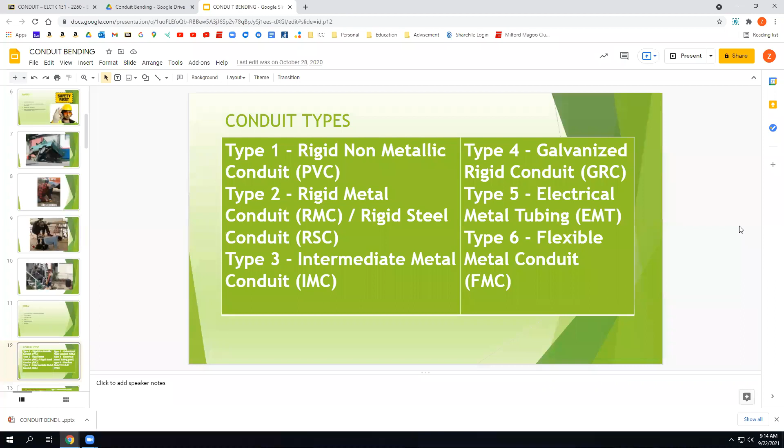Conduit types. Rigid non-metallic conduit, that's PVC. The ends and fittings - if the ends are not belled like you see in that picture, they have fittings that you can buy. And how do you put PVC conduit together? Some of you should know this. With glue.

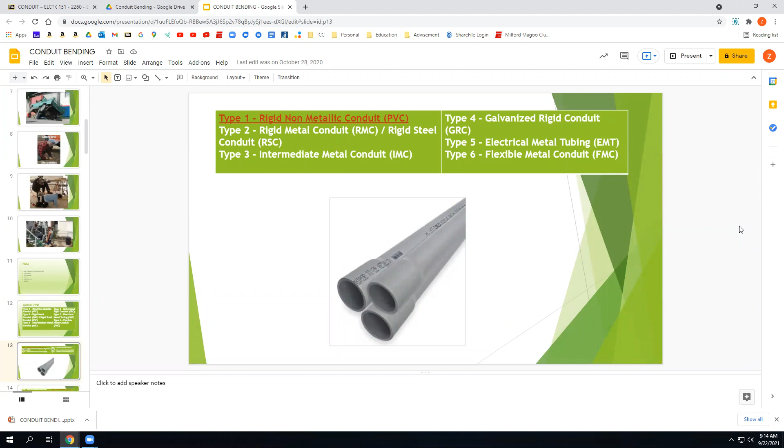RMC, or galvanized rigid conduit. You'll see both types in the code book. Most rigid that I've ever used has already come galvanized. I've never seen rigid conduit come from the supply house that doesn't have a galvanized coating on it. Galvanizing is that silvery looking outside coating. It's like a paint, but it's more to protect it from the elements.

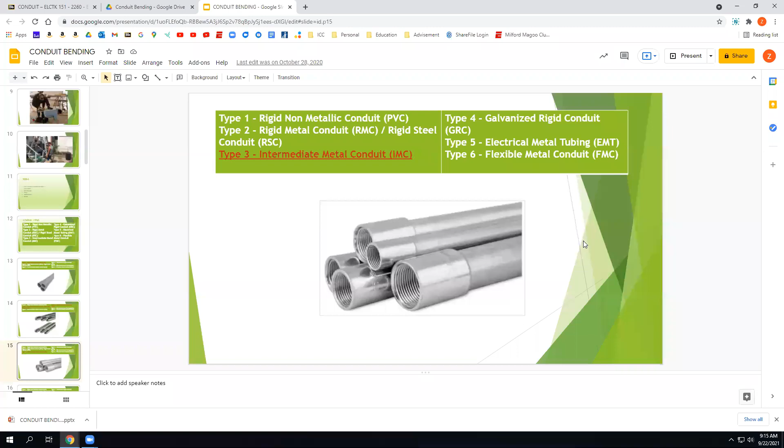And that type of conduit gets threaded together, so you can see the ends of the couplings are threaded. IMC is the same kind of thing, but it's made out of aluminum, intermediate metal conduit. It's just not as heavy duty. EMT, that's what you guys are bending in the lab, and those use either compression type or screw type fittings and couplings.

And then flex, and it's called flex because it's flexible. You get that? Somebody asked me about a mnemonic so they could remember that. You're gonna have to just study.

All right, somebody asked me about seal tight. Anyway, if you guys are curious, we do have some flex and we have some metallic and non-metallic seal tight here. Seal tight is just weatherproof - it's flex, but it's PVC coated. And if it's metallic seal tight, it has this flexible conduit inside it. And if it's non-metallic, it's just a PVC flexible tube.

Somebody asked me if it's okay to use, and I said, well, yeah, absolutely. But in the field, if you're good at what you do, people that don't know what they're doing use flex all the time because it ends up looking like shit. But if you can put EMT or rigid conduit in there, it's more professional.

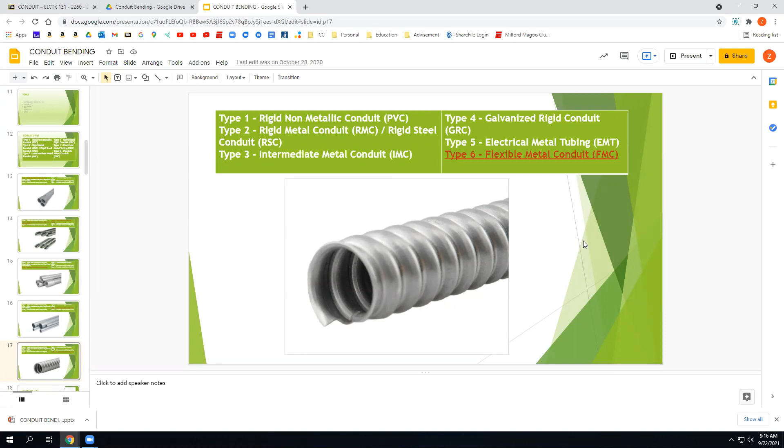We went over this last week, but you're allowed 360 degrees in any pipe run, and that's just between two pulling points. So hang on a second.

That's not what I want. Anyway.

What I mean by that is if I'm going from junction box to junction box to junction box, I'm allowed 360 degrees between these two. It doesn't have to be 360 degrees total, it's between any 2 pulling points. And we went over the reasoning for that. What is the reasoning for that? Why do they limit you to the number of degrees between pulling points?

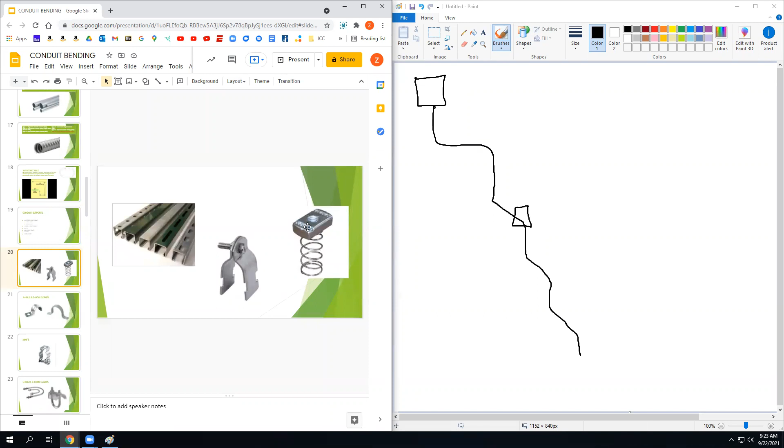unistrut—this is called a strut strap, this is called a spring nut. Can you see which one's a 1-hole strap and which one's a 2-hole strap? Yeah, count the holes. This is called a mini, and you'll see those on the wall bends when you do those.

U-bolts, conduit clamps. But don't discount those pictures, you'll want to look through that to take your quiz—just saying. Support spacing, all right.

This is an example of some numbers that you would pull out of the code book, and we'll go through more of those numbers later. EMT, section 348-13. I don't know what the -13 means.

It's supposed to be a dot, but there's a whole section in the code book on EMT. If you've done your code homework, you've probably seen it already. With EMT, for certain sizes of different types of conduit, you're allowed so much space from each pulling point.

So that would be a conduit like is shown in the picture, or this is a 4-square junction box. You're allowed so much room from that point to your first support. For EMT, you have to support it within 3 feet of the termination. Then between supports, between the boxes, you're allowed 10 feet, and that does not include a coupling. You don't have to be within 3 feet of a coupling.

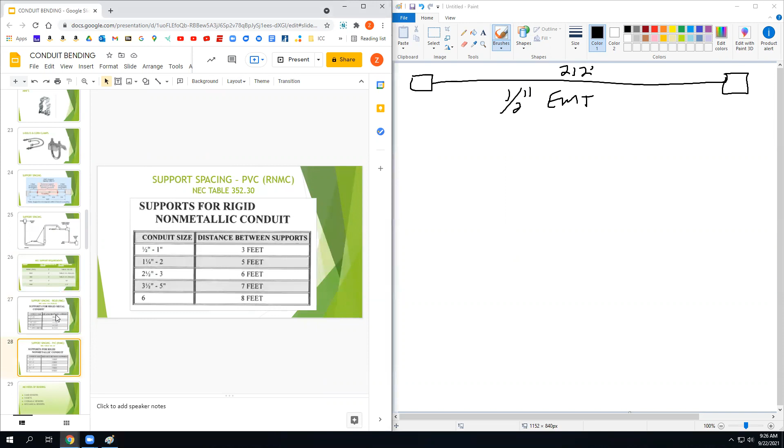You're going to start with this table here, NEC support requirements. Then you're going to finish up with another one.

Here's the quiz question: 212 feet of half-inch EMT between 2 junction boxes. How many supports? Heath says 71. He's very confident. M Daddy says 21, I think. That's his answer on the quiz.

212 supports. Lewis says 212. 212 feet between the boxes. Okay, what's your answer? Okay, what's the first 3 feet away from each box, then will be 209.

Well, let me check. I don't know what to put right now. 206 will be... 22. 22. Says Lewis. All right, we got 3 guesses there. Anybody else want to guess?

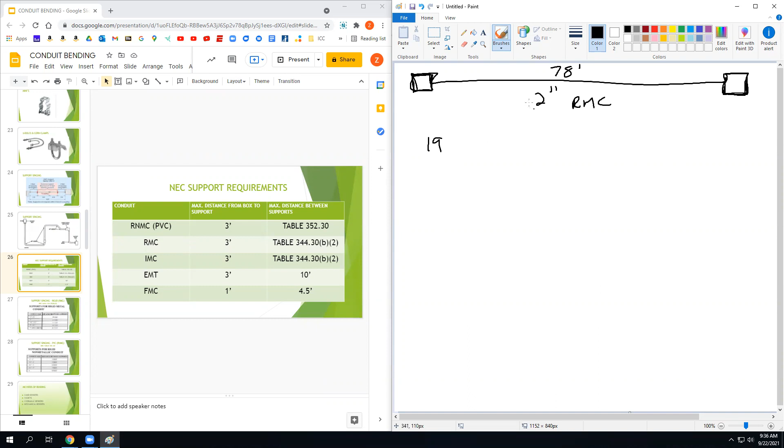So how many feet do we need at the box? From the box, you need 3 feet. Right at the table, yep. So 3 feet from the box. And how many feet between supports? Conduit size, distance between supports, it says it on that first table. Okay, max distance between the supports, see table 344.30B2. Oh, look right there, it's right there. So 2-inch RMC, supports for rigid metallic conduit, we're allowed 16 feet between them.

Okay, kindergarten method, anybody else want to guess before we figure it out? Okay, 3. And then what's our next one going to be? 19 plus 16 is 35. 51. 67. 1, 2, 3, 4, 5. 73. Right, 67 plus 16, and then eventually we got a box at 78.

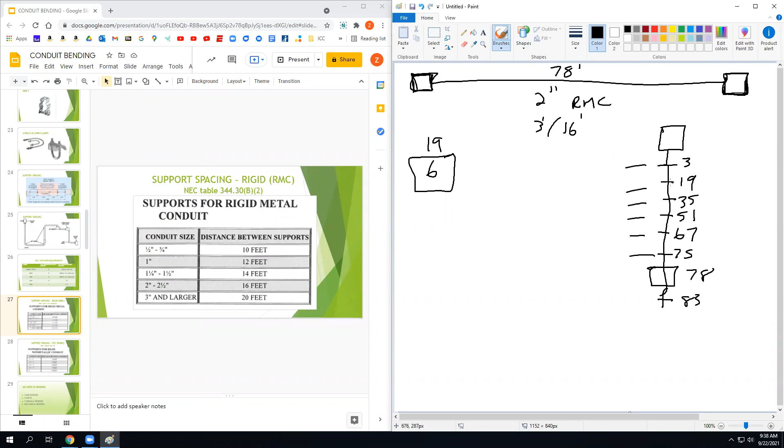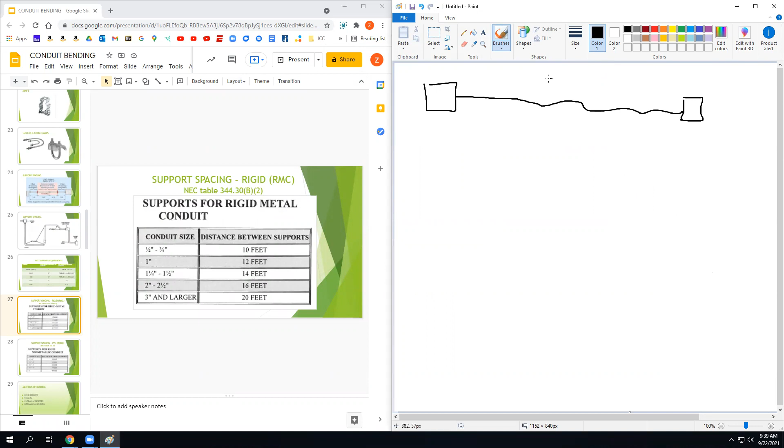You get the prize. Who said 19? We got a flexible one. Run and flex from there to there, 32 feet between the boxes. And we're using, I don't know, 3/4 inch flex.

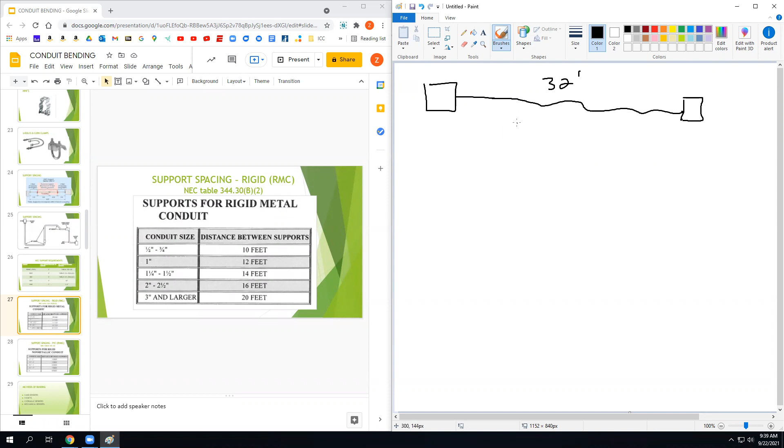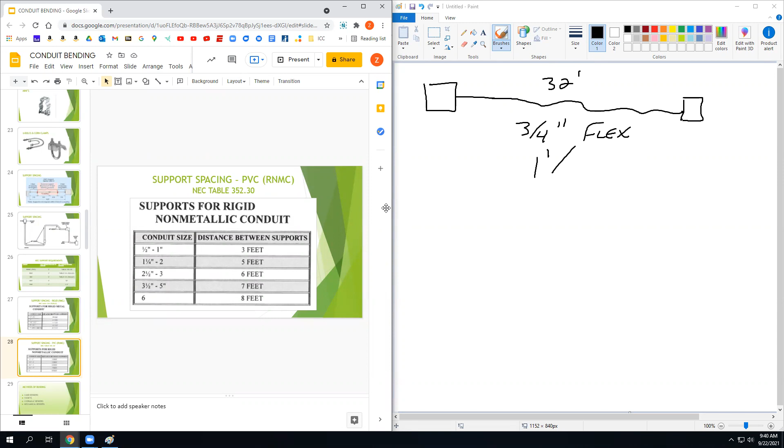So what's our spacing? 7 feet. What? 17 is your guess? 7 feet. Oh, you already looked it up. So you're 1 foot from the box with flex, and you need... where'd you get 7 feet from? Table 352.3. Or am I looking at the wrong one? 0.30? Yeah, this is supports for rigid non-metallic conduit. Oh, looking at the wrong one then.

PVC. If you're looking at the first table, start with this one. No matter what example you're given, start with this one. FMC, flexible metal conduit: 1 foot, 4.5 feet. That's our other number.

4.5 feet, guesses? 8. 1. 5.5. 10. 14.5. 19. 23.5. 28. No, yeah, 28.

32.5. Ethan, you're gonna check my math, right? Oh, 32.5, so we're past the box. Box is at 32 feet. We're within 4.5, but we're not within 1 foot next to the box, right? So we got to add one there that's at least at 31. So that would be 1, 2, 3, 4, 5, 6, 7, 8. So Carter's wrong.

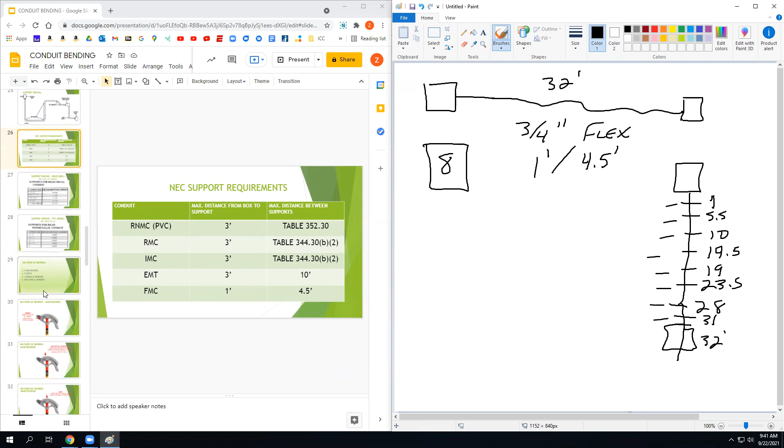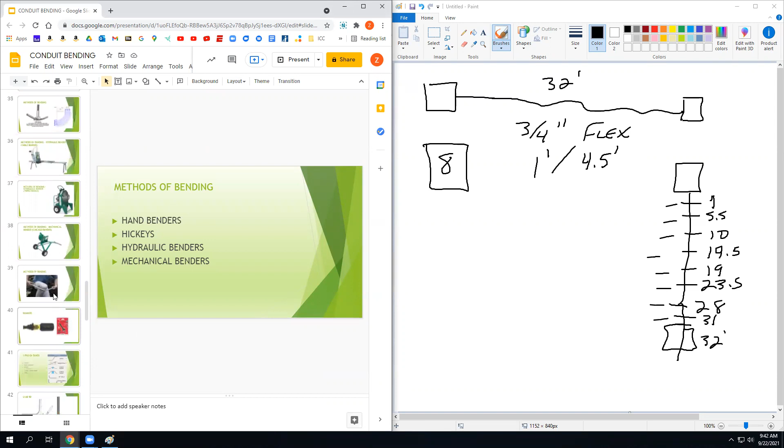Hand benders, hickeys, hydraulic benders, mechanical benders. Let's skip down a little bit. This is a hydraulic bender, it's a table bender, used for bigger, usually larger diameter EMT conduit, like 4-inch. It's nice because bigger conduit is heavy, but you also need a bigger radius shoe to bend bigger EMT conduit because it's thin wall, and if you don't use a bigger radius shoe, it will kink.

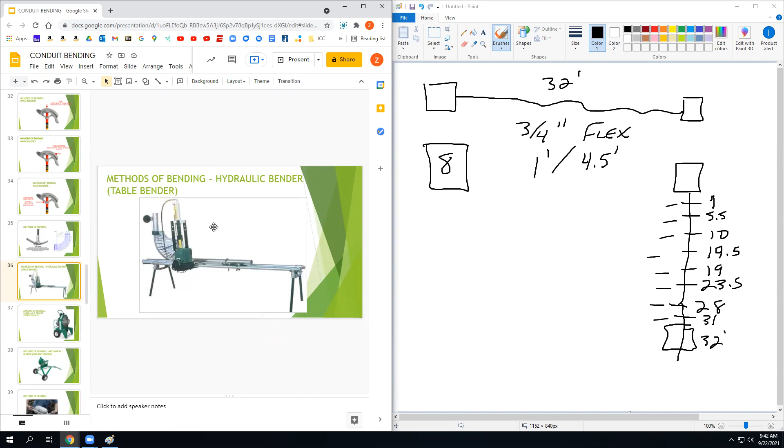This is called a triple nickel. There's lots of different manufacturers for these, but it's just a hydraulic bender, pretty self-explanatory. There's a shoe on the front that's got, on this one, 3 different radius of pipe that you can use. Then there's a button you press, and it uses hydraulic pressure to bend the pipe along that shoe. And there's degree marks on the front of it.

This is called a triple nickel because it's the Greenlee 555 model. I didn't know that when I got into the trade. I thought people were saying triple nipple for some reason. But that's just because of where my head's always at.

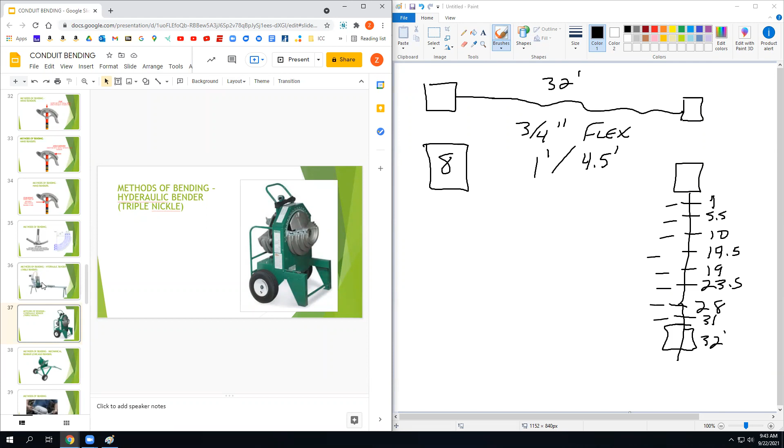I don't have the table bender, I don't have a triple nickel, but I do have this, it's called a Chicago bender. This is a mechanical bender, it does not use hydraulic pressure, it uses leverage. So if we get a little time at the end of the semester, I'll pull that thing out and we can make some bends on some bigger pipe with that.

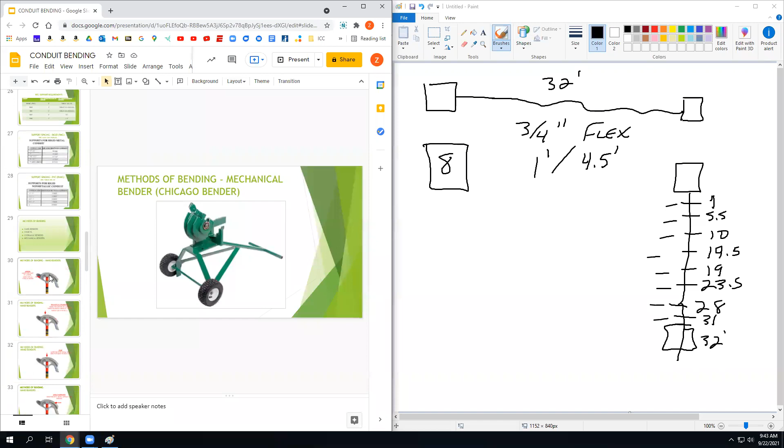Back to hand bending though. Get yourself familiar with these slides.

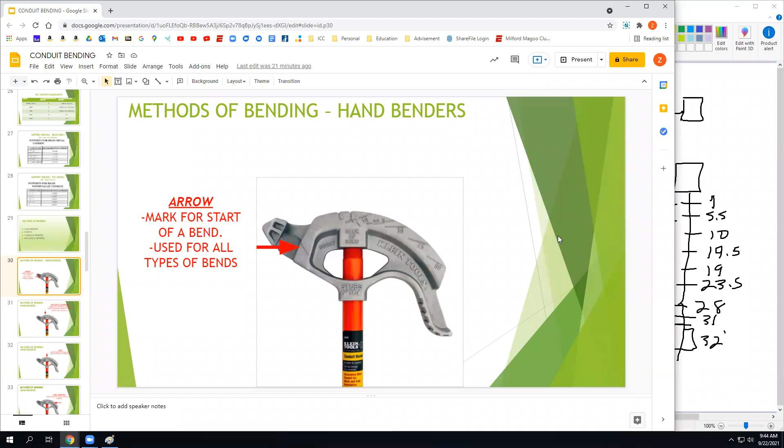What size pipe is the bender that's shown? What size pipe is that used for? Can you tell? There's a clue. Can you see it? How'd you get that? The stub 6-inch to the arrow means that's the take up for this bender.

So a 6-inch take up is for what size conduit? Remember when you're bending a 90, you need it to be so tall, you have to know what the take up is. It's on your cheat sheet. Right, 3/4 inch EMT.

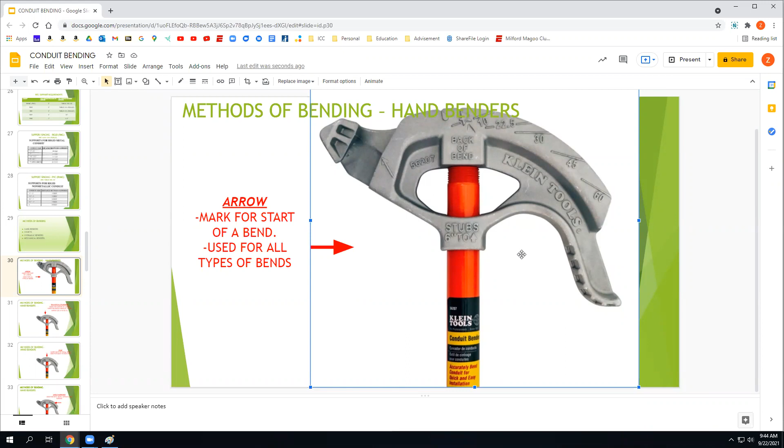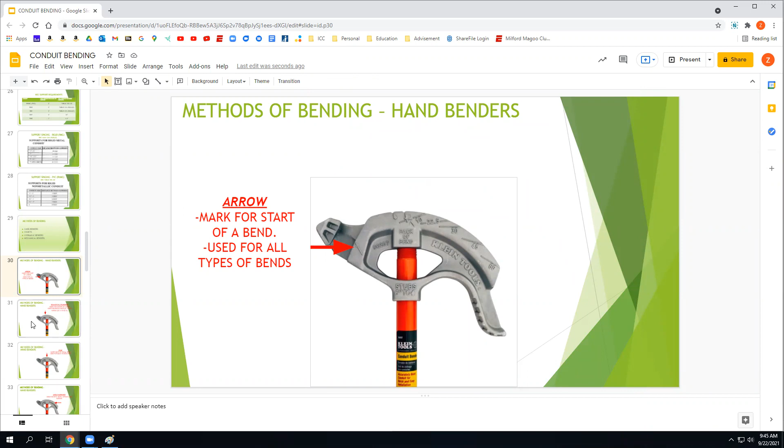Arrows marked for the start of the bend, used for all types of bends. Remember, that's the start of the radius of the bend. Rim notch, used for the center of a 3-point saddle.

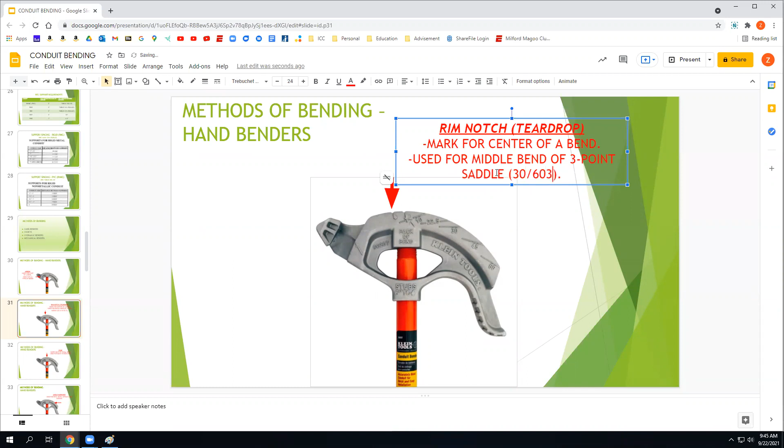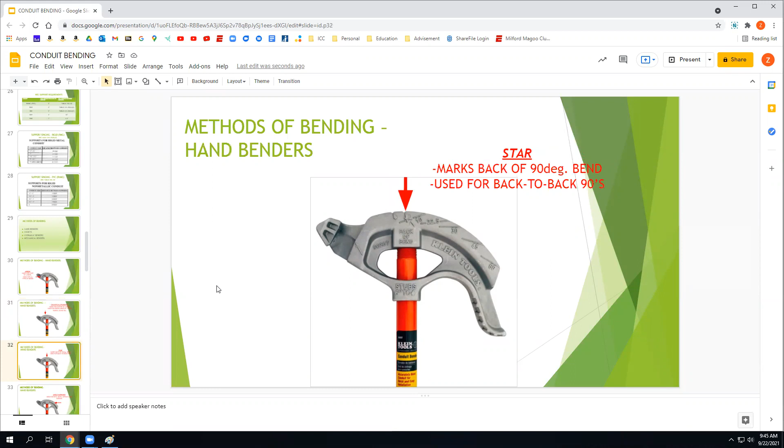This is wrong. There would be a 45, 90, 45 on there, but this one, no it doesn't. It's got a notch on the star, that's for the back-to-back 90, and it's got another rim notch, which is the teardrop on this Klein bender, for the center of a 3-point saddle. Star marks the back of a 90, used for a back-to-back stub 90.

Angle marks. Oh, stub height. I didn't even know that was in there.

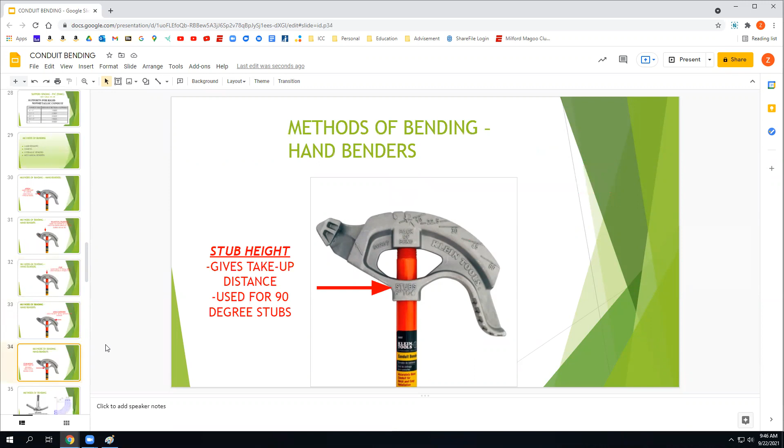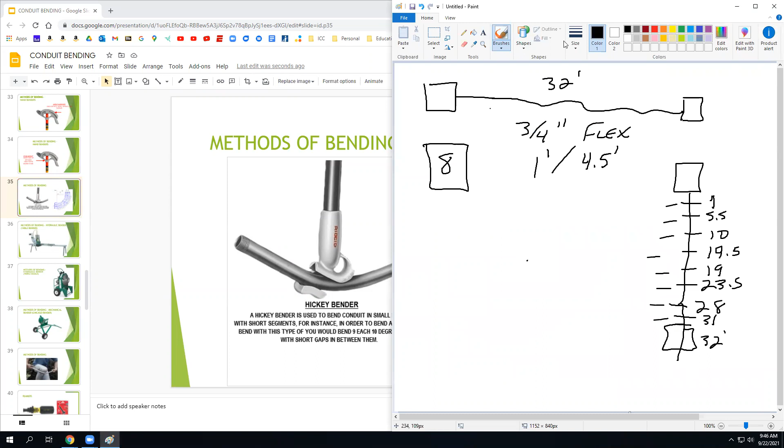This is a segmented bend. I'll just show you real quick. If you didn't use segmented bends, this is like big rigid pipe.

The radius of the shoe you're using, if this is 1 inch rigid, the radius of that shoe is the same. So what they're trying to do here is make this look a little more aesthetically professional by making the radii the same distance apart.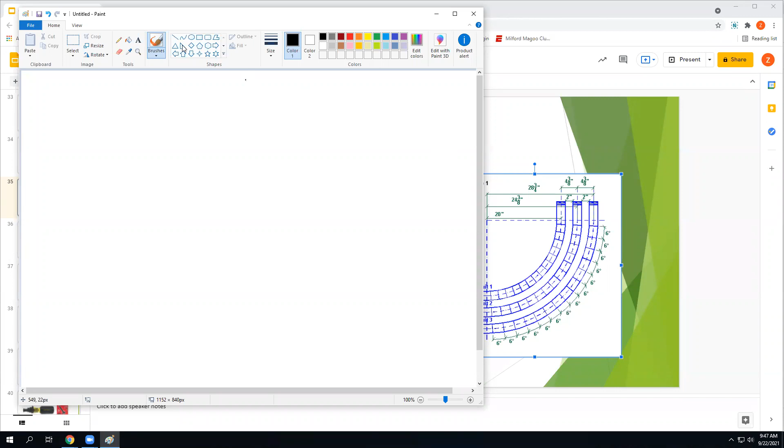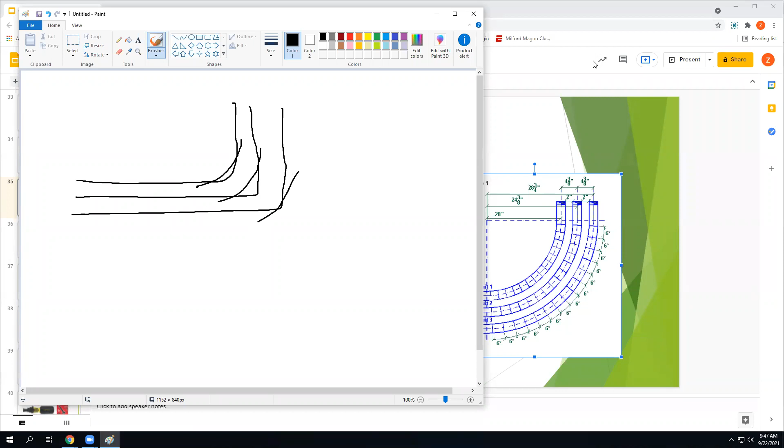Whereas if you didn't use segmented bends and those little 6-degree increments, your bend would look more like that, with a little bit more distance and then straight up, a little more distance and then straight up. So in order to make the radius look the same on each of these, they used segmented bends to keep that spacing the same. Does that make sense? It's a really professional way to bend conduit.

The other thing you could do with segmented bends: I've pulled fiber optic cable and made pipe runs and pulled fiber optic cable through it. To keep the radius less strenuous, because the more you bend a fiber optic cable, the more light it loses and the less bandwidth it has. That's all stuff that's way beyond what we do in this program, but if you ever wanted to learn about fiber optic communications, it's actually really cool. The goal with fiber is to keep the radius of any bends in the cable down. The more straight you can keep that cable, the longer distance you can communicate with it.

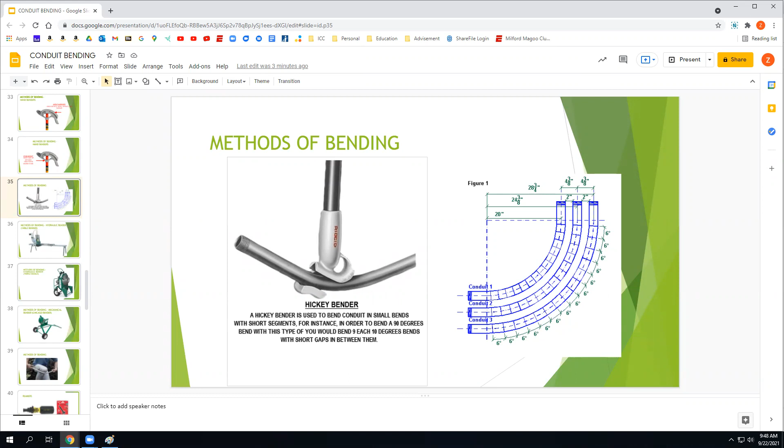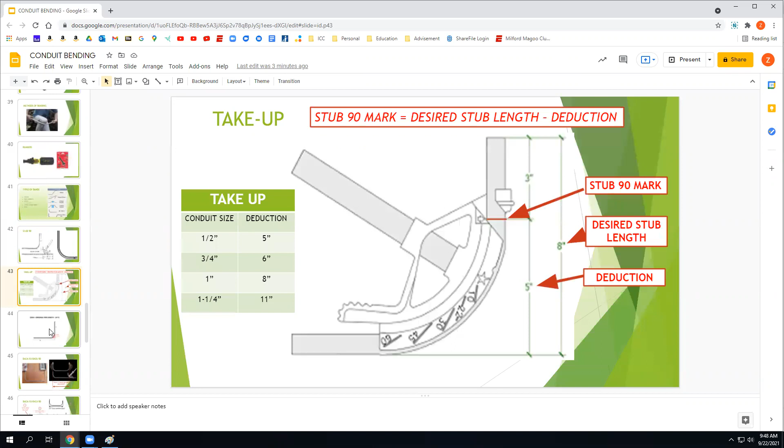Okay, reamers, types of bends, you've done all this stuff before. Take up. Oh, gain. We need to talk about gain.

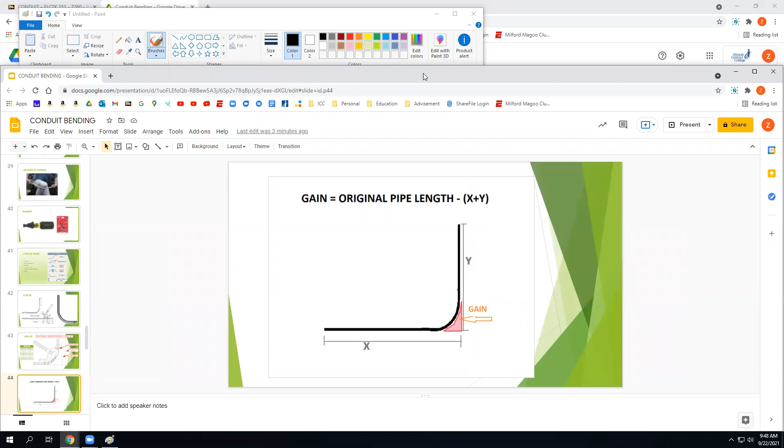Okay, so here comes old conduit. Ben and Zach running rigid pipe, 3-inch rigid. So it's got these threaded ends and couplings. And there's my coupling, and I got to get into this box right here.

And I know that the distance between this and the edge of my fitting—I got a Myers hub in there that I'm trying to get to, and I got to hit this right on the tits because this box is already there. I can't just put it wherever I want. There's other conduits coming out. So I got to hit this coupling with this 90.

In other words, with EMT, I could just measure this distance, and if I know that distance, let's just put some numbers in here. Let's say this is 6 feet, and this is 3 feet. With EMT, I could just bend that puppy at 6 feet and cut this off wherever I want it to, because it's a screw type or compression fitting.

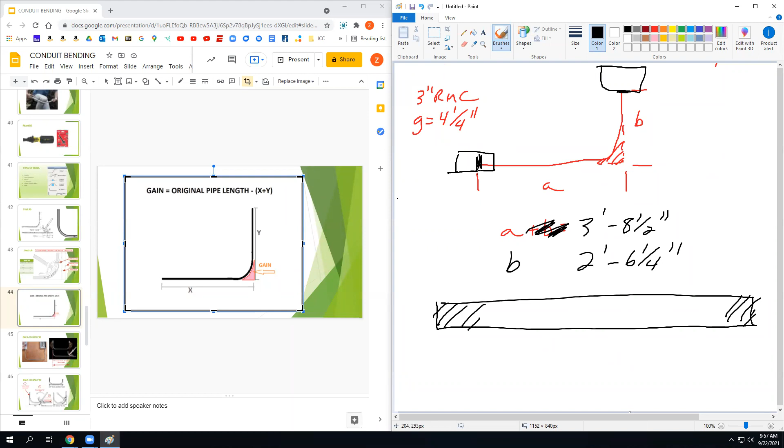Including the what? I just measured from the last point. So I've got a pipe in here, right? It's inside this coupling. I measured inside there from A to the outside edge of this coupling. So this will be like this. And I need to bend that 90.

I know my distance A is 3 feet, 8½ inches. I know my distance B is 2 feet, 6¼ inches. So I need to cut this thing and thread it before I bend my 90. The gain for the shoe that I'm using is 4¼ inches.

What's 3 feet, 8½ inches plus 2 feet, 6¼ inches? 6.43. Yeah, yeah. Can you do this math? Six feet, 2¾ inches.

This is 5. 8½, that fraction, if you put it in, what do they call this? Compound fractions. If you simplify it, 2 times 8 is 16 plus 1 is 17, that'd be 17/2. 4 times 6 is 24 plus 1, that'd be 25/4. How do you add 2 fractions with different denominators?

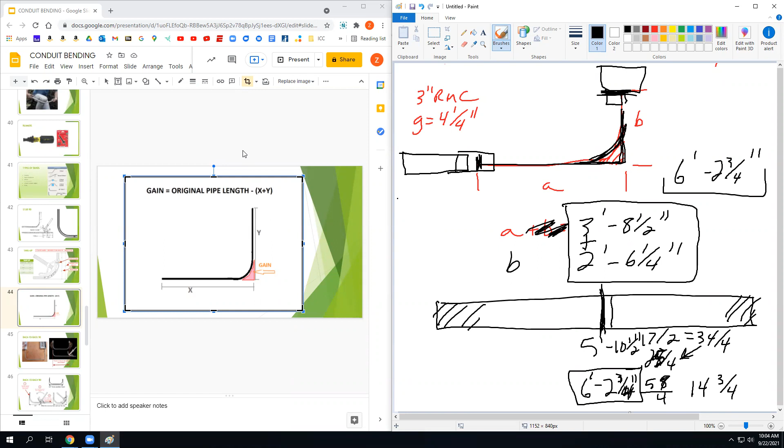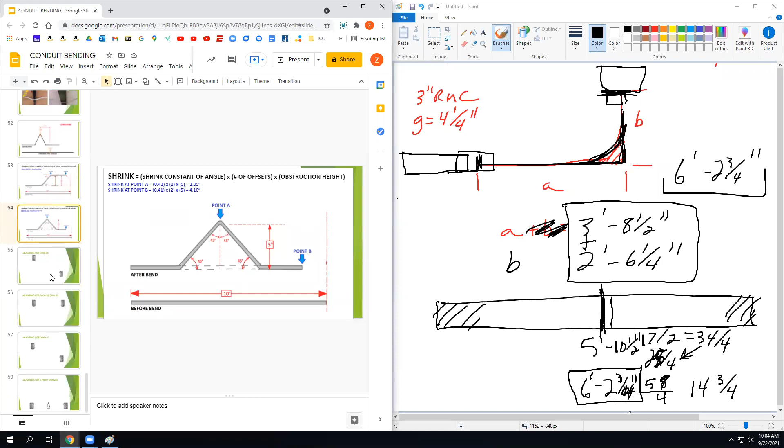You all know this stuff. You know this stuff. You know the trig. You know shrink. You'll see shrink on there, which concludes this PowerPoint.